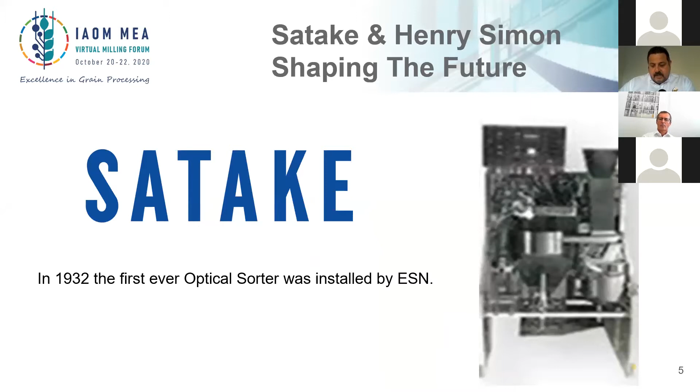In 1878, Henry Simon installed its first roller mill at McDougall Brothers in Manchester. And in 1932, ESN, a Satake-owned company, designed and installed the first ever optical sorter. And since then, their use has become standard in many industries around the world. Optical sorters have been used by wheat breeders since the early 1990s. They are also widely used by farmers and grain suppliers, and they have become a vital and accepted part of the food processing industry.

So how can an optical sorter help you, the millers? Well, to understand this, we need to talk about the challenges faced by the millers. Most importantly, you need to maximize profits by producing high quality flour at the lowest possible cost. This can be accomplished due to the more efficient separation achieved by an optical sorter. The resultant wheat on the first break can be cleaner, both from a wide range of impurities and from a microbial point of view. Sometimes a very specific impurity needs to be removed, for example, stink bug. This can be removed quite simply by optical sorting.

The resultant flour would be potentially cleaner from a bran inclusion, flour color, or ash perspective. In this way, if some flour with a low ash content or bran inclusion is required, it would be possible to make less low grade.

Mr. Gary, can you please unmute yourself? I think you muted. Yes, it's just 5 seconds that we're muted. All right. I don't know. Yeah, we are on the same slide. Can you hear me now? Yes, we can hear you clearly. Thank you. Okay.

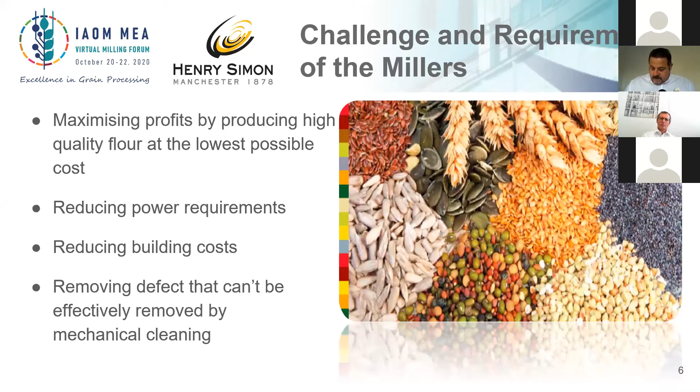Reducing power requirements. Optical sorters cost less to run than mechanical sorters. If the optical sorter replaces distoners and trio cylinders, then a lot of motors would be removed and a lot of air usage. The distoners are huge air users, all of which costs money.

Reducing building costs. The footprint and weight of an optical sorter would be less than the equivalent mechanical sorters, hence reduce floor plate space and possibly reduce building costs. Removing defects that can't be removed by mechanical cleaning. This is certainly true if the optical sorter is fitted with infrared cameras. Other than that, most impurities can be removed by mechanical means, but not as efficiently.

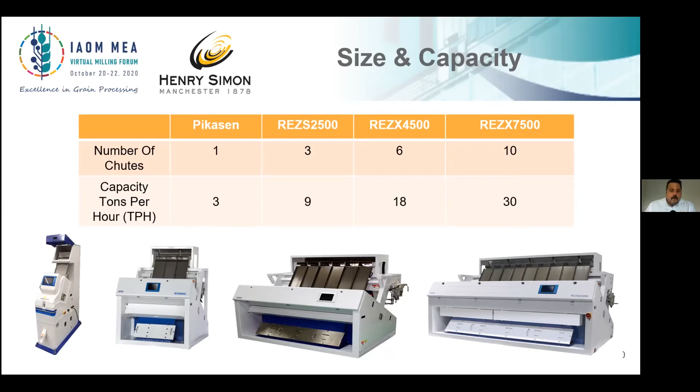Optical sorters nowadays typically use full color camera technology, allowing them to work on a wide range of applications by removing impurities by color and shade differences. Color cameras can differentiate between 16 million different color shades. The sorters that I have described so far are full color, and this is a step forward from previous sorters, which were monochromatic, otherwise known as contrast sorters, which could just differentiate between light and dark.

Now on a full color camera sorter, we can use all the colors in the visible spectrum, RGB, red, green, and blue. And we can distinguish the exact color of each piece of defect. So the brown, yellow, and green grain would be rejected, leaving a pure orange accept.

However, if the application requires removing foreign material with a similar color to the accepts or that is transparent, such as glass, then the optional addition of infrared sensors is required. Advanced infrared NIR technology can detect the moisture differences between organic and inorganic material, such as glass, plastic, stones, and other items that have similar color to the accept product, which can now easily be detected and rejected. The cameras recognize subtle color differences, contributing to food security and improving the final product quality.

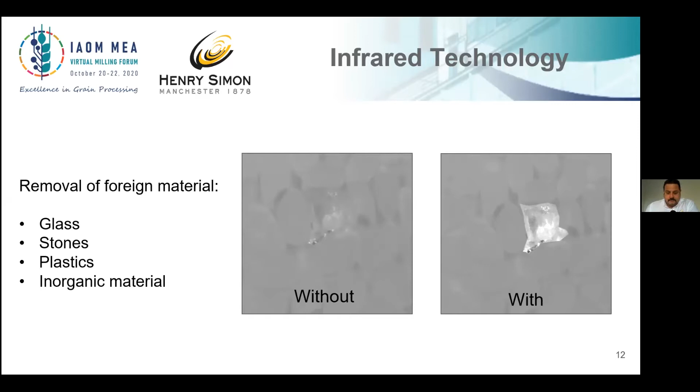The optical sorting machine can be integrated in the cleaning flow diagram of wheat mills, depending on the mill's requirements in terms of cleaning capacity, availability of space, and efficiency of existing mechanical cleaning equipment. The optical sorting machines can be integrated in the first cleaning section or in the second cleaning section. The optical sorter can be integrated along with the existing machinery or instead of certain cleaning machines, such as spiral seed separators and indented cylinders.

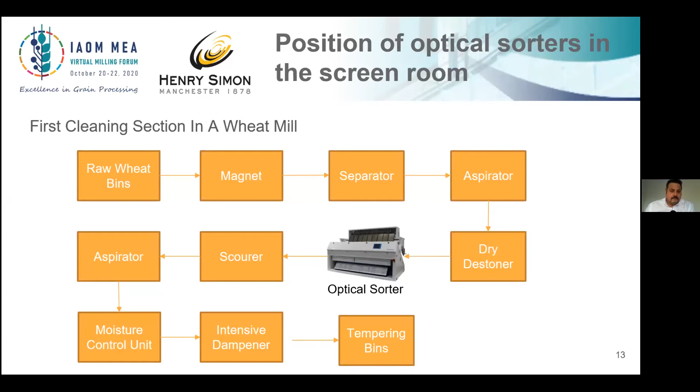When using the gravity selector in the first cleaning section, the optical sorter is fitted with fewer product feed chutes. The gravity selector is set to deliver about 25 to 40% of the full feed, which in turn reduces the feed on the optical sorter. The heavier wheat phase from the gravity selector is sent directly to the scourer. This is ideally suited to mills with limited space or budget.

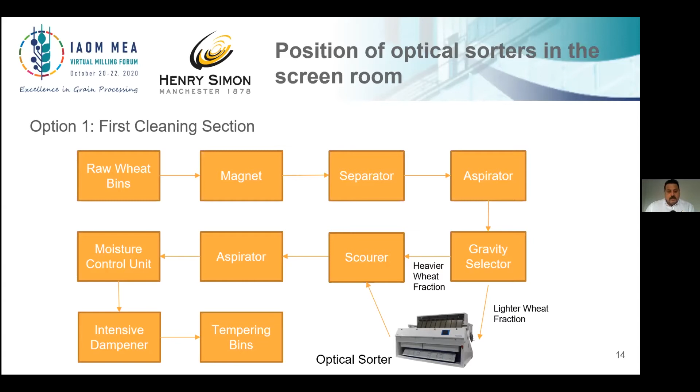An optical sorter can also be integrated in the second cleaning section. It can be integrated between the scourer or debranner and the first break bin. In this location, the optical sorter could be a smaller unit because it could be rated on the capacity of the mill rather than the cleaning capacity, which is generally about 15% higher. It can be very effective as the flow rate of the wheat stream is steadier and lower in capacity.

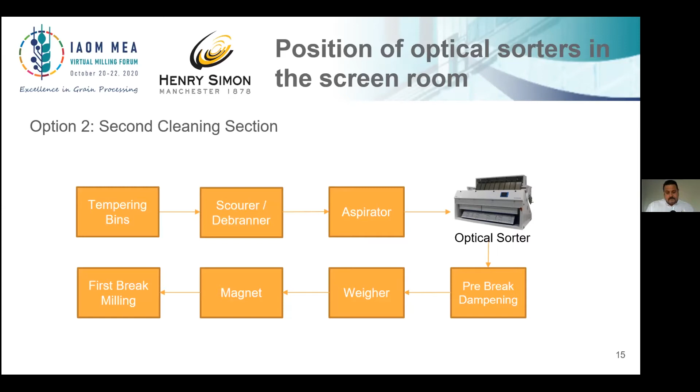At this location, the screenings and broken grains that are removed by the cleaning system can be recovered by a small optical sorter. The accepted good product can be fed back to the original input of the sorter or mixed with the sorted good product.

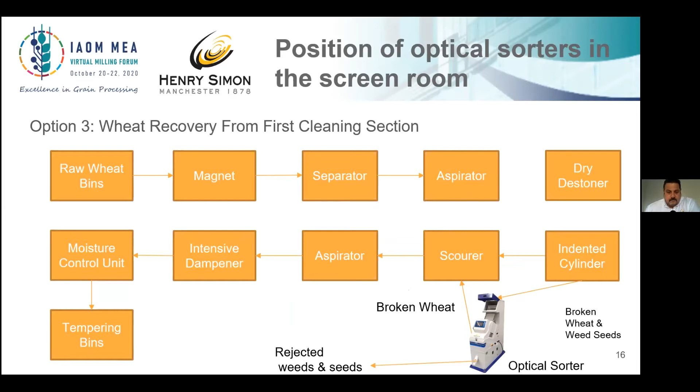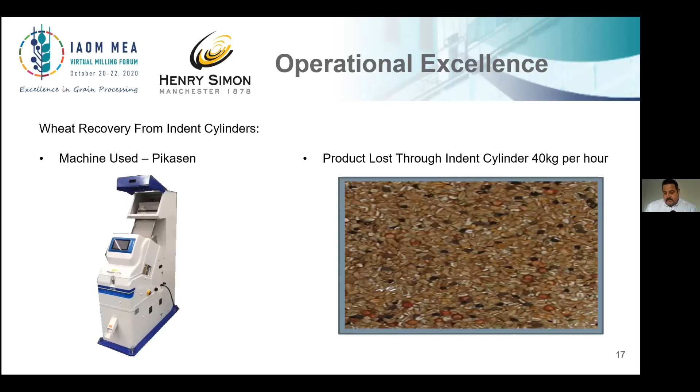This was a recent test we carried out in South Africa, where we placed a Pikasen optical sorter to scan the rejected grains from the indented cylinder. We found that on average, approximately 40 kilos of product was being rejected every hour by the cylinder. As you can quite clearly see, a large amount of good quality grain was recovered by the Pikasen. In fact, it was over 96%.

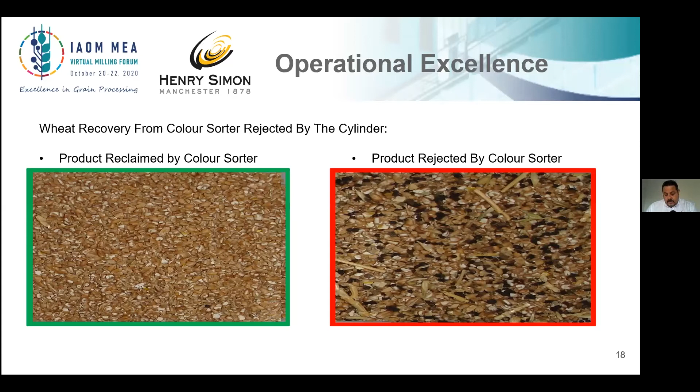Just over 38 kilos of good quality grain was literally being thrown away every hour at this mill before we installed the optical sorter. Sadly, this is something we see at almost every mill we visit. Thousands of dollars worth of good product needlessly going to waste.

Take a moment and think about your own mills. How much good grain are you losing every year? A simple solution like this one is very easy to install, very easy and simple to maintain, and could save you upwards of $50,000 every year.

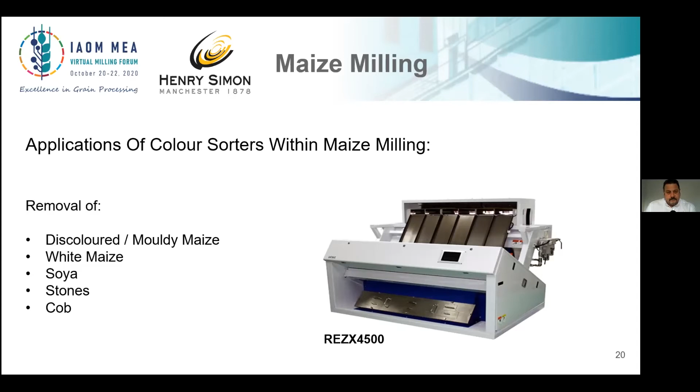Up until now, we've primarily talked about wheat applications, but optical sorters can also be used for maize milling. They can be used in the removal of discolored or moldy maize, white maize, soya, stones, and cob. These pictures show a typical example of a sort for maize in the pre-cleaning section. As you can see, less than 0.5% of the maize is rejected, but the ability to efficiently separate impurities from maize without appreciable maize loss can bring a huge saving to you, the miller.

Specific product testing can take place prior to installation of the optical sorter, and this ensures accurate and consistent removal of specific impurities or a range of impurities.

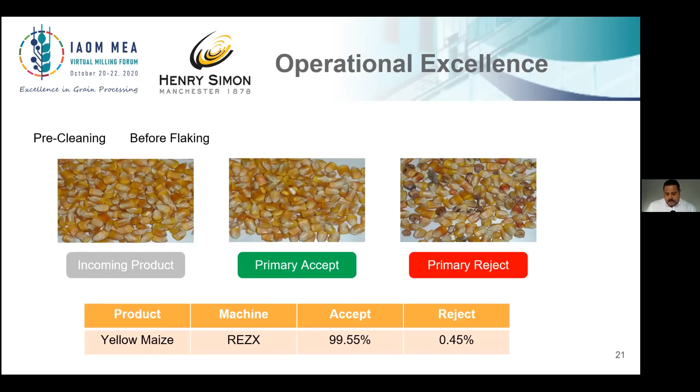So what are the product advantages? Large capacity and cost effective. Up to 30 tons on a single machine, or multiple smaller machines if space is an issue. Sorters are now very cost effective. Previous sorters were low capacity and expensive. And now with the advancement in technology, electrical components are cheaper and more readily available. Previous generation monochromatic sorters would be about $11,000 per ton, whereas today you get the advantage of full color sorters at about $4,500 per ton.

LED lighting offers a much longer lifetime of up to 20,000 hours. Running 24/7, that equates to about 3 years. The older generation lights only lasted for about 3,000 hours. Typically, operators can be trained in 1 to 2 days and will have a full understanding of how to operate the sorter and maximize the efficiency and profitability of the sort.

All our sorters have easy access points and require no special tools or shutdown, allowing for easy maintenance and cleaning. The new sorters have full color cameras for subtle color differences and can recognize 16 million colors, and they work very similar to the human eye.

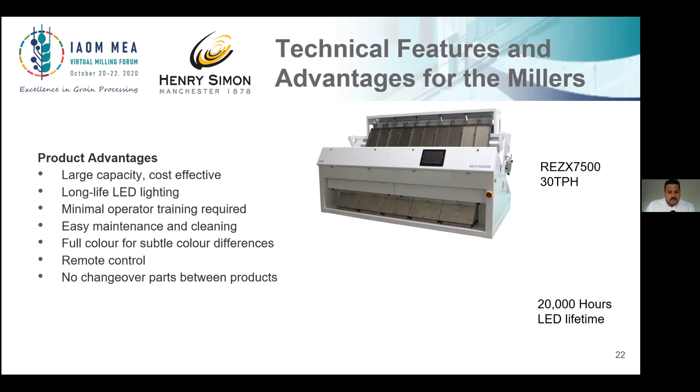Quick and easy product and defect setup. You now simply present the product to the camera and the software will take care of the rest. The software will recognize the core color of the product and this becomes its reference. The same is done with the defects, and the software automatically sets the sensitivity to remove the defective grains.

Sorters are now much more reliable and can be installed directly on the mill floor. They are very simple to install with single phase power and compressed air, which are already available in a mill plant.

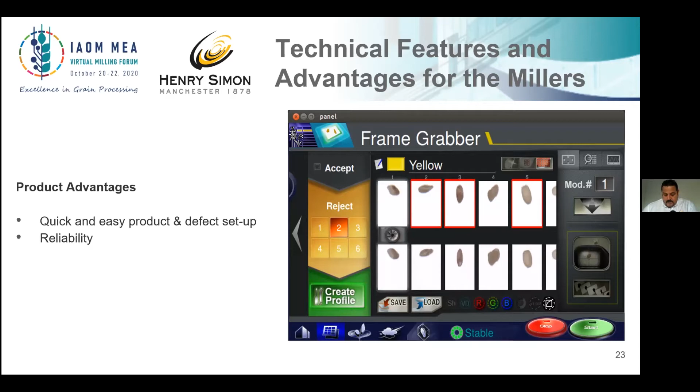50 presets can now be programmed for product settings and can quickly and easily be saved to use again on future sorts. The software automatically makes lamp adjustments to match the preset. Saved presets can be duplicated and then additional accepts and defects added quickly to set up for similar sorts.

Our machines have auto calibration, which calibrates itself every time it wipes, so there is no need to reboot for recalibration, thus meaning no downtime. Basically, the machine will auto clean the window every 30 minutes to ensure the results are consistent. When it does this, the software will automatically smooth the camera signals for any differences found. Some machines have to stop to process this, but not with the Satake range.

A quick return on investment: as shown in the previous slides, your initial outlay can be returned in less than 12 months.

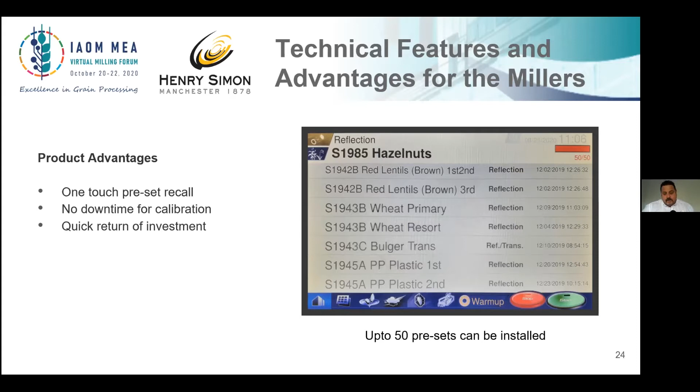So to conclude, with today's high food standards, wheat millers need the new advanced technologies such as optical sorters in order to meet the demands of market requirements. It's now time to use new technology to your advantage. Why rely on traditional mechanical cleaning only?

Optical sorters are more efficient and reliable and have captured the interest of wheat processors who want a more consistent end product. The optical sorter is not only used for the better quality it provides, but it also saves energy, as it uses electronics rather than heavy, expensive motors. Optical sorters are easy to maintain. They are relatively inexpensive to maintain as well compared to the traditional cleaning machines.

The optical sorter was first adopted in the durum milling process, and they are highly effective in the removal of ergot and black seed contaminants. Thus, millers are now producing higher quality, safer, and cleaner semolina. Today, optical sorters have become widely used in wheat flour milling to produce high quality and safer flour by ensuring the removal of allergens such as soya in wheat. Optical sorting is now considered a better, if not vital, option for inclusion in any modern wheat cleaning plant.

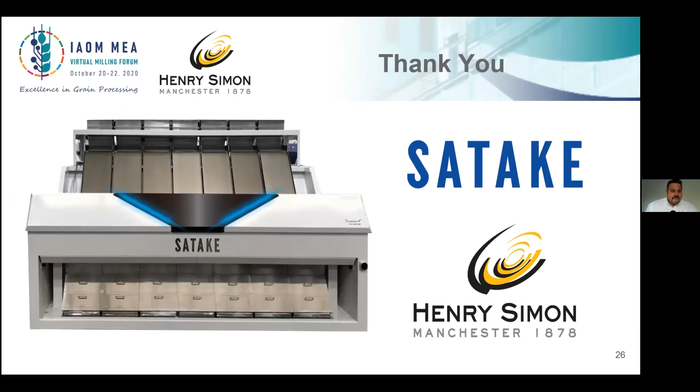Now, from my side, listening to your presentation, I have seen you explain the concepts of color sorting installed in the first cleaning and also the second cleaning. So what is your recommendation to millers? In which case should they use it in the first cleaning and when in the second cleaning?

It's a very good question, Martin. It's one we get asked quite a lot. Typically on a brand new mill, you'd have the sorter in the first cleaning section, simply because you want to remove any impurities as quickly as you can in the cleaning process. In a new mill, all the machinery, storage bins, etc., are new and they work efficiently. So it makes sense to have the optical sorter in the first cleaning section and to remove the contaminants as quickly as possible.

However, when it comes to installing an optical sorter in an existing mill, which is most of the time, there are many factors we need to consider. Most importantly is where we can fit the sorter in the mill. Where do we have the space? We need to ensure minimum disruption to the flow of the mill and the most cost-effective solution. We'd also need to consider the customer's budget, and this will also determine the size of the sorter that we can install and thus whether we put it in the first cleaning or second cleaning section.